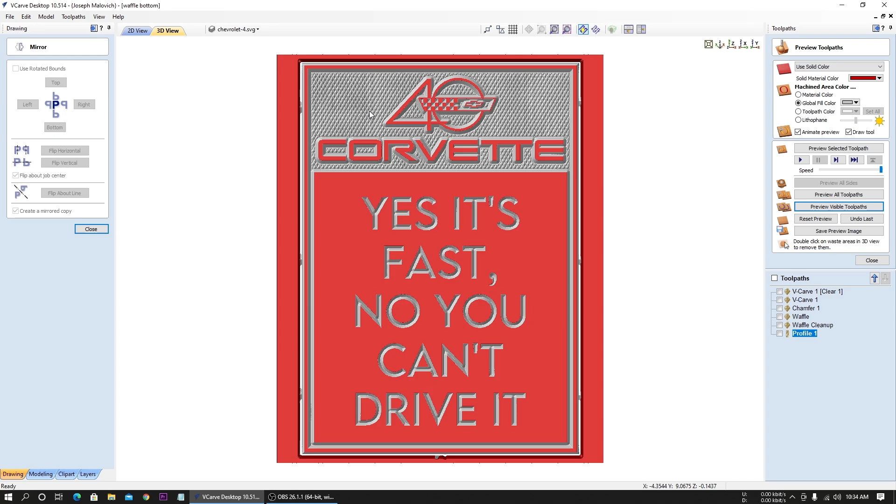We're going to replicate this type of pattern here, diamonds in the flat background of a sign.

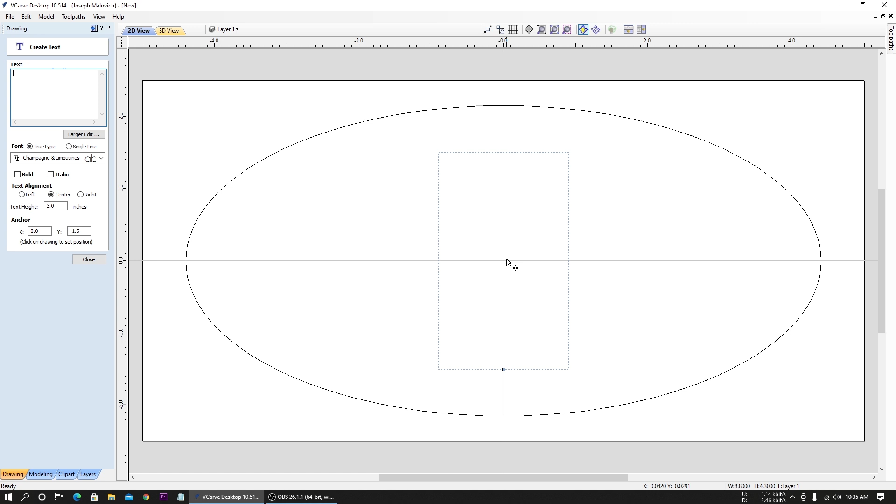Here I've got a blank file that I'm starting with. Just going to put some real simple things in here. Let's make it a little bit smaller, 1.25, so this is going to be minus 0.625.

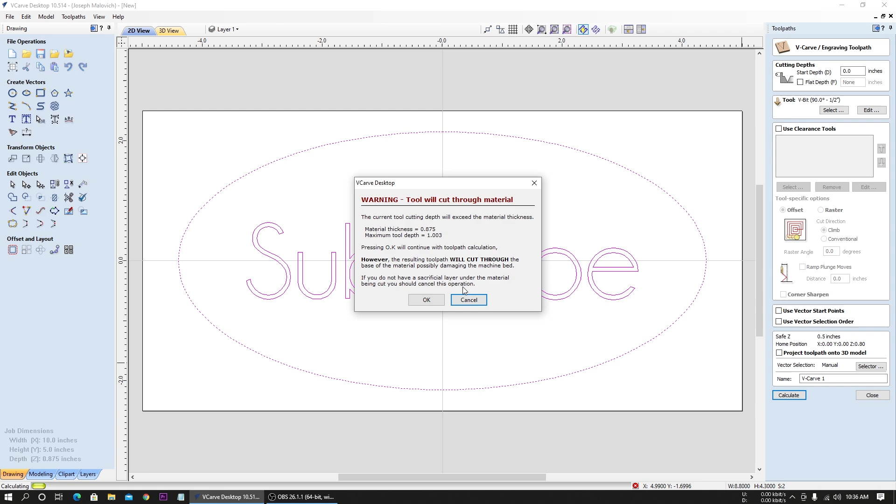Now we go to our toolpaths, and normally when you VCarve something, you select what you want to VCarve and it'll do everything. Let's go with this one, calculate. So what it does is it cuts, in the base format, as deep as it needs to achieve that shape.

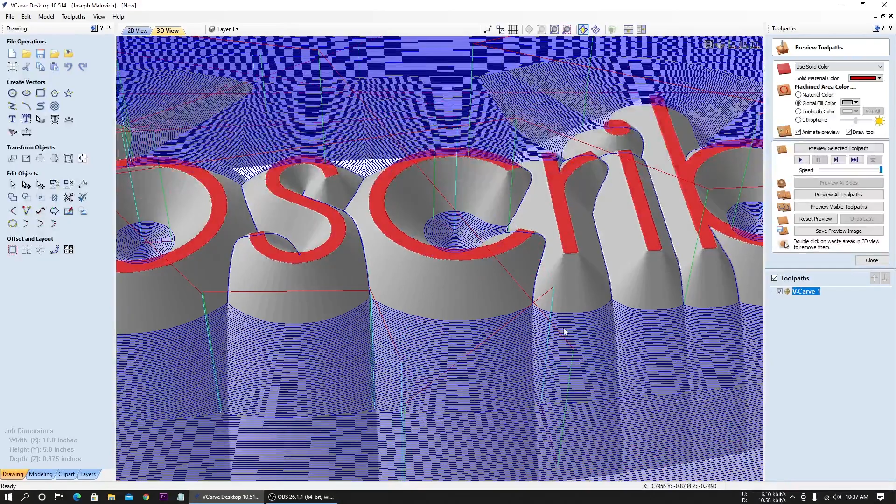But you can select a flat depth here. I'm going to go 200 thousandths, and then what it does is it carves out the flat area with the tiny little V-bit tip.

So if we go into preview this, you see it's going to do each one of these little lines, and it just takes forever. So we're going to try to do something that's a little bit faster and a little bit more decorative than trying to do these flat areas like this.

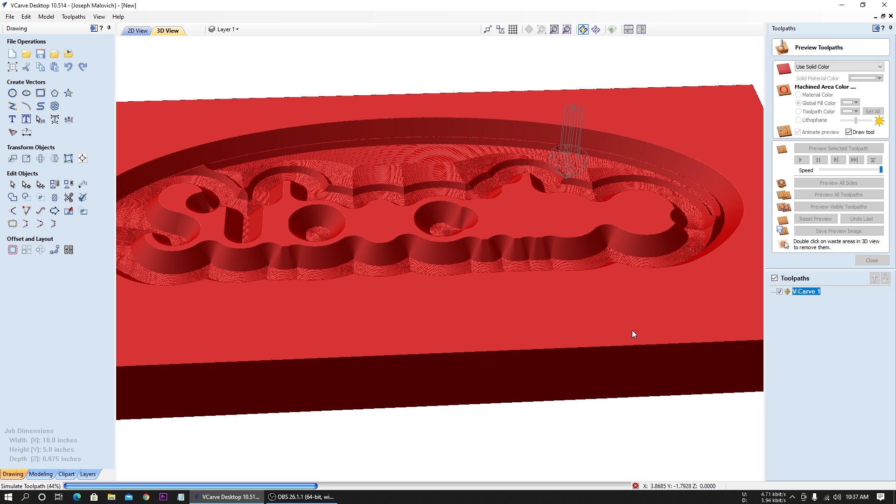Back to our 2D view, the first thing we're going to do is offset all of these inwards by 0.2 inches, which is the same as our VCarve flat depth, and not create sharp offset corners. All right, that looks pretty good.

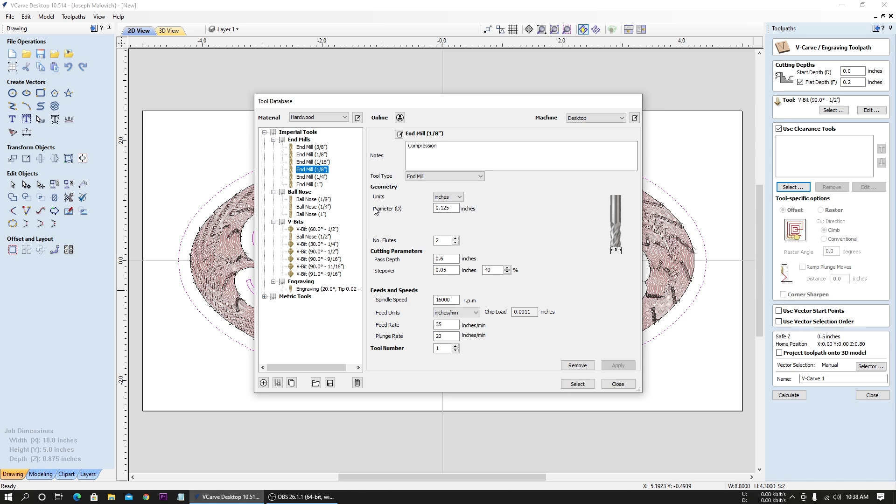Now that new selection is going to be what we want to not carve with our flat depth. So if we go into our VCarve here, we're going to use a clearance tool. Normally you would do like a 1/8 inch flat end mill, calculate.

And that would require a bit change, and it wouldn't take quite as much time, but it would also lead to some artifacts, and the flat bottom wouldn't look as sharp as it could. You don't see them here, but a flat bottom usually with the CNC router leads to artifacts.

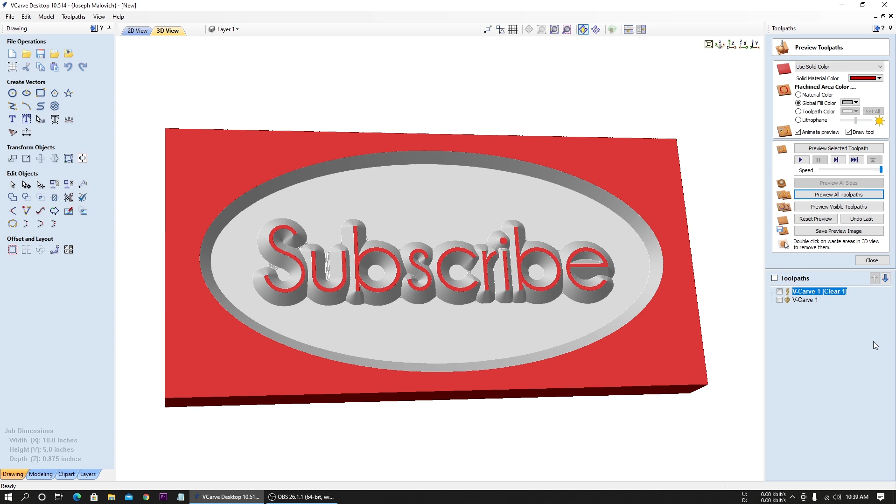One way to trick it into not doing any of the flat carve with this clearance tool is to select the V-bit as the clearance tool. So that looks almost identical to what it did before, but here's the trick.

Just don't do that. So now I have deselected this clearing path, leaving everything that we want to carve with our new vector texture.

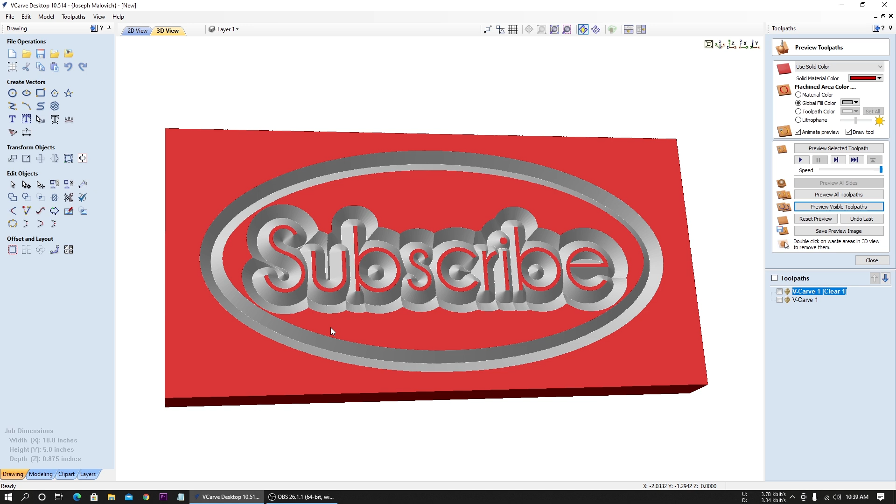Back in our 2D view here, we want to select everything that will be textured, which conveniently is only those few selections.

When you do an offset, you can have it select the new offset, so you don't have to go through and manually select everything. And then when you're done with this, you immediately go to your vector texture, and now everything is already selected that you're going to be texturing.

These are the settings that I have for the diamond pattern that I've been using. You can of course change the background that you get with all of these settings here. You can change the spacing to be really wide or narrow and just achieve different effects here. But I'm going to do...

0.1 inches is a good spacing that I like, with 0 variation, 0 amplitude. Wavelength doesn't matter if there's no amplitude, and 0 noise.

As well as changing the angle, to edit these you do have to select that, go back to your create vector texture, and if you just hit preview again it deselects your area, but you will have to go in and reselect your area to get the correct selection. And now this will fill in just the area.

That looks good. Okay, now I'm going to do another vector texture. This one's going to be minus 60 degrees. And there's our diamond pattern.

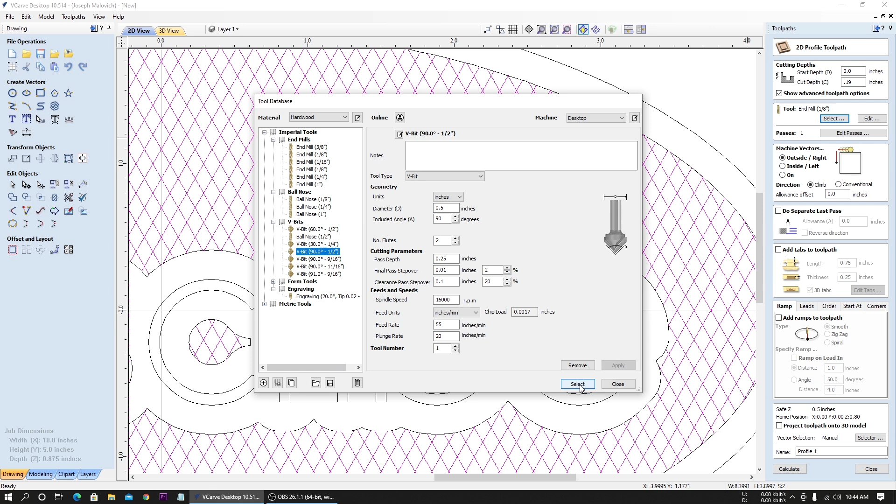Now for our V-bit, we're going to select the same V-bit that we did the perimeter. One thing to mention while I'm still on the tool bit is we've already cut the perimeter, so there's no material that it's plunging into. To speed up the carving time, we'll set this at a much higher plunge rate because it's plunging into air, and that just speeds everything up.

We don't need a ramp or leads. For order, I like to do whatever the shortest path is just to speed it up. It doesn't really matter — you could do left to right if you want to watch it, but shortest path is fastest. You can hit optimize start points. Corners, doesn't matter. Calculate.

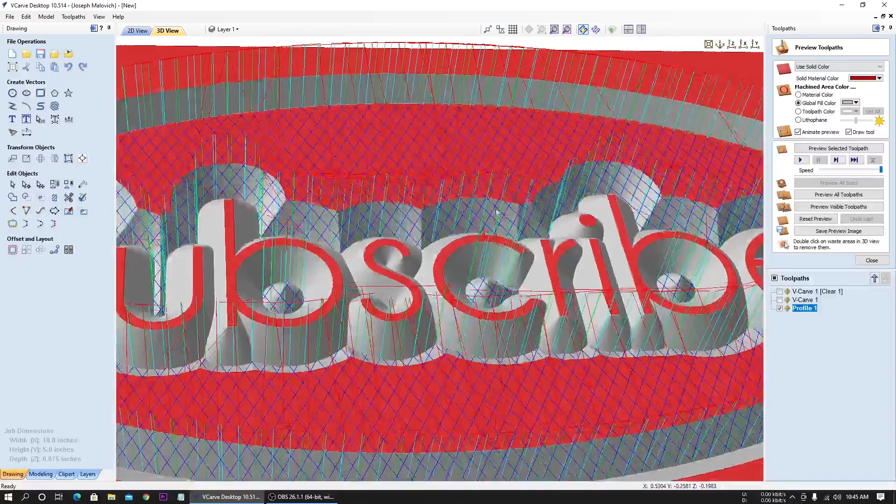And there we go — there is our diamond pattern. Let's reset preview visible toolpaths, which is only going to be these two.

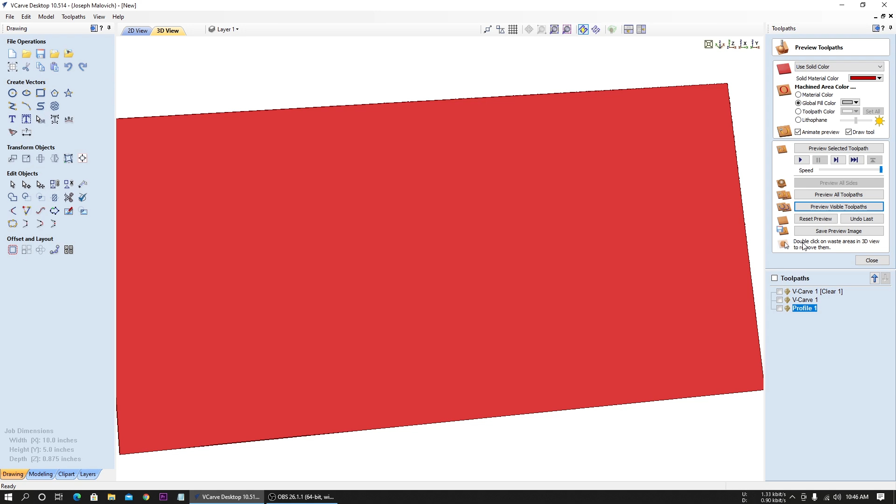That took quite a lot of time on my computer, so for video, very high is nice — you get extra quality that you guys can see, but standard will just speed this up a lot more. Reset preview visible.

And then it just rams right through them. Actually, on the video it looks pretty similar, so we can just keep going with that. I turned up the simulation quality just to show, zoomed in, that it doesn't actually go all the way to the edge.

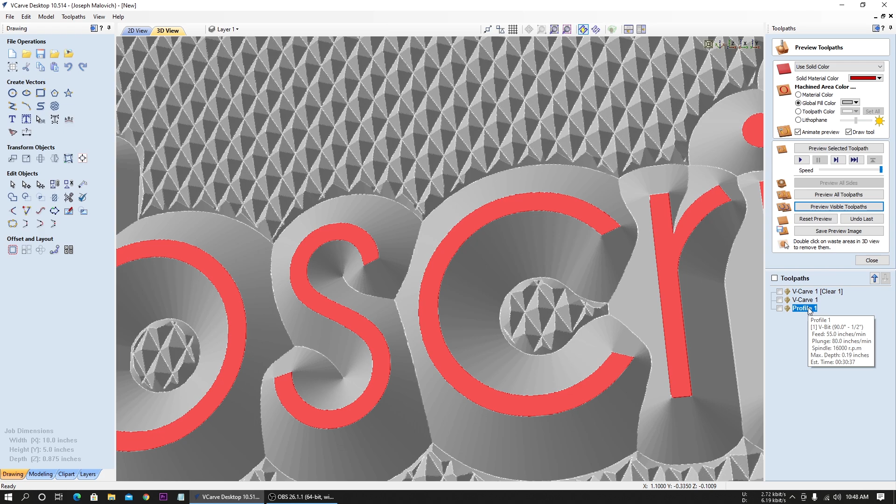That's because we set our profile depth to only be 0.19 inches here. You do want to be grain aware when doing this. If the grain is in a vertical direction, you probably want your diamonds in a vertical orientation. If your grain is horizontal, maybe use different horizontal diamonds or square diamonds, or you could do just perfectly straight horizontal lines — that could look good as well.

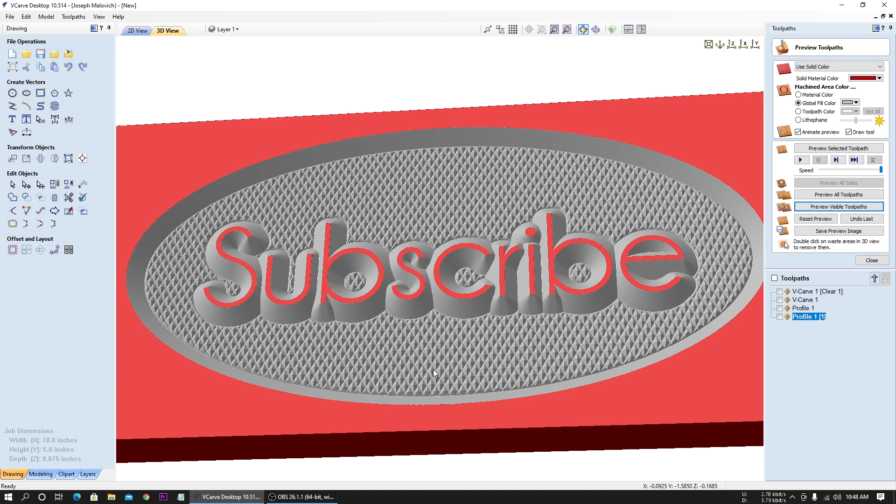But I often get a lot of fuzzies in here, so what I'll actually do is duplicate this and run it a second time, just as a cleanup pass, and that removes most of the fuzzies that I have left.

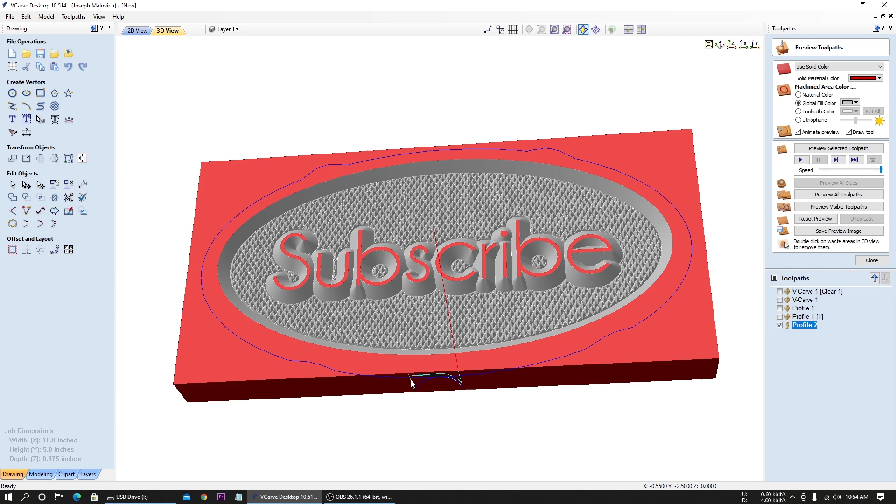Now, just for this demonstration, I'm going to do a perimeter. We're going to give it a 1/4 inch offset, select a 1/4 inch end mill, add tabs, edit tabs. We're going to do a tab there and there and there and there. Close. Add ramps, add leads to, start at the bottom. Leads — good. Calculate. My depth here is going to be 0.875 inches.

Edit passes — we're going to go up to 4 passes. I'm doing it in black walnut, which is pretty hard. All right, preview visible toolpaths.

Doing a really nice waffle bottom there, doing the perimeter cutout. All right, excellent. Now this last profile cut that I did here, you'll notice it goes all the way around without any tabs.

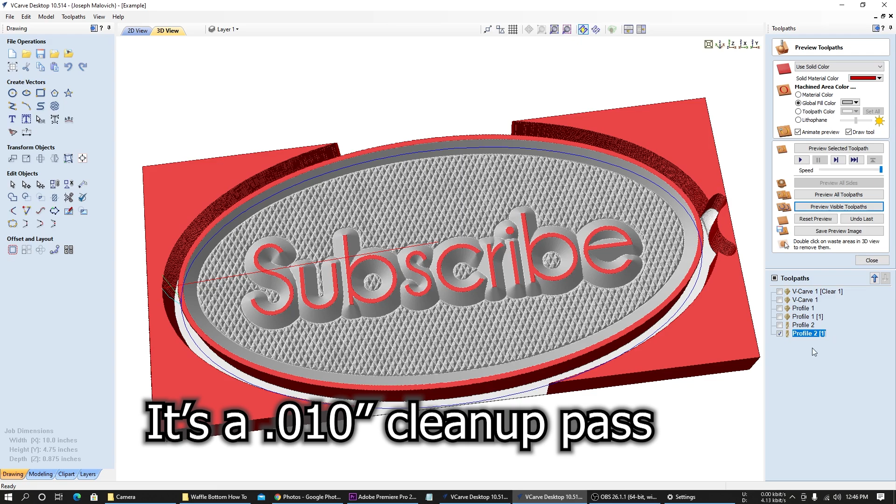This profile, I do have tabs in there — you can see right there I have a tab. The last cut, and you have to be really careful when doing this because you don't want to cut a finger off or run your finger into the router bit — when it does this final pass, I actually have to press on it with my hand so that it doesn't move.

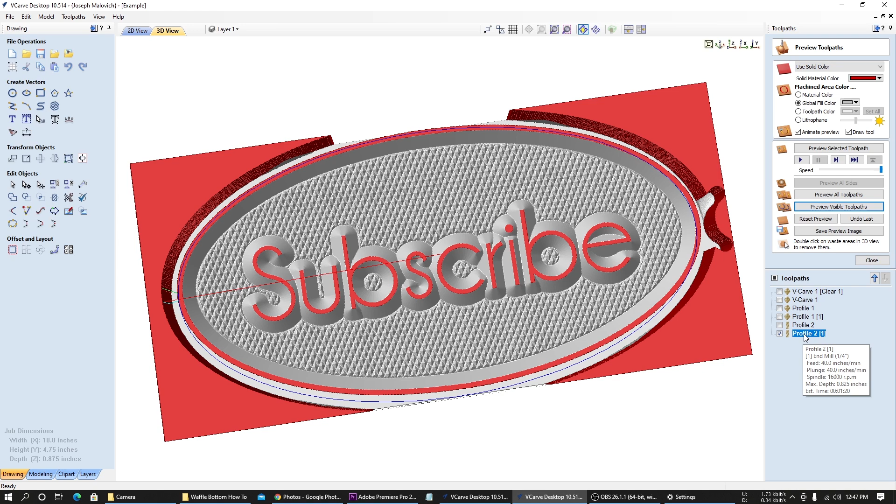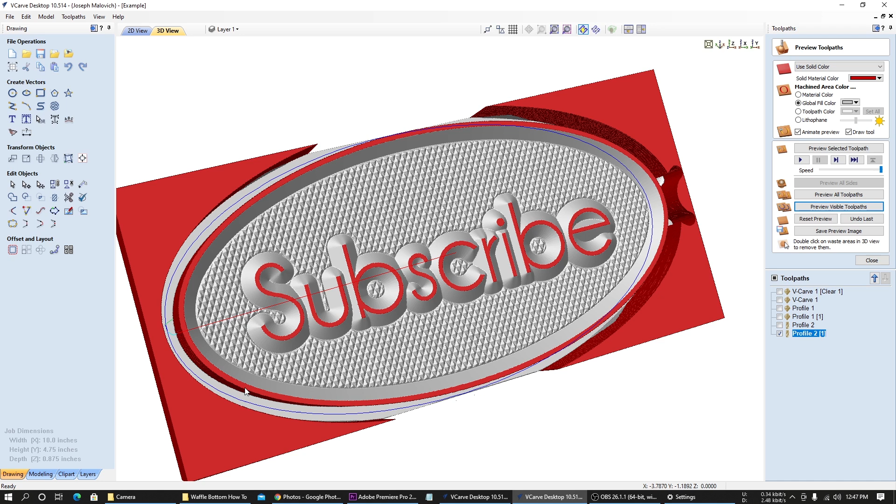I'm filming this after I already cut it out, and I realized that the start and end point for this - you can see the last profile cut is right here, and ideally you would want your last few tabs to be right along here as it's coming in to finish that cut, so you're not relying on your hand pressing it down with no other tabs remaining.

Another option, when you're doing the first profile cut, is to not use any tabs. Just go down to within 50 thousandths of cutting through, and then on this last profile cut, do your last 50 thousandths, and that'll keep it mostly secure in one spot. You will have to hold the workpiece down as it cuts that last little bit on the edge.

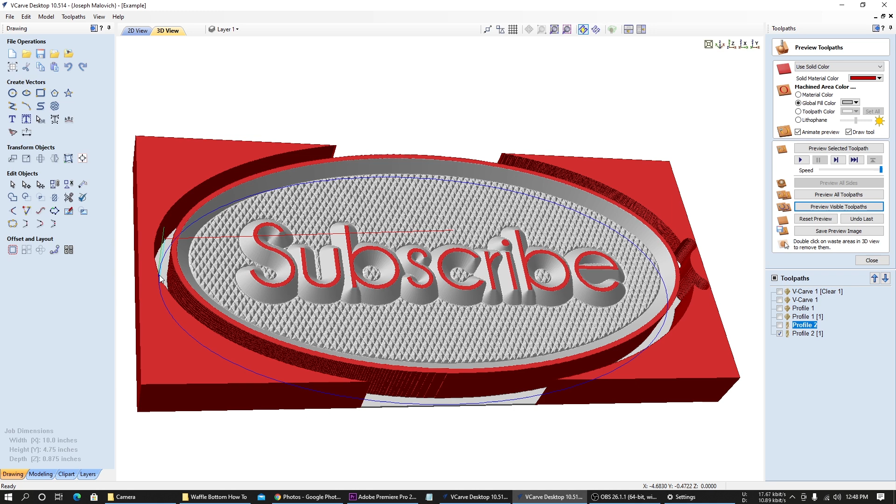The key when running this through your post processor is just don't post this clearance toolpath. So for visible toolpaths, that'll be these 3 that are checked. That's VCarve 90, save that. And then all I want to do is this final last profile toolpath with a 1/4 inch bit, profile 0.250. All right, that's our toolpaths done.

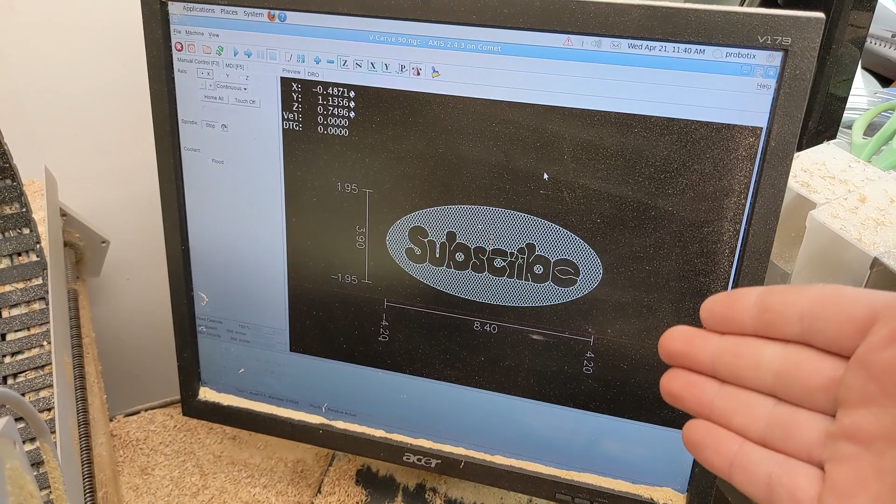Let's go hit it on the CNC. And here's what it looks like on my CNC computer. This is Linux CNC, running on an eBay router that I've mounted on a Probotix Comet.

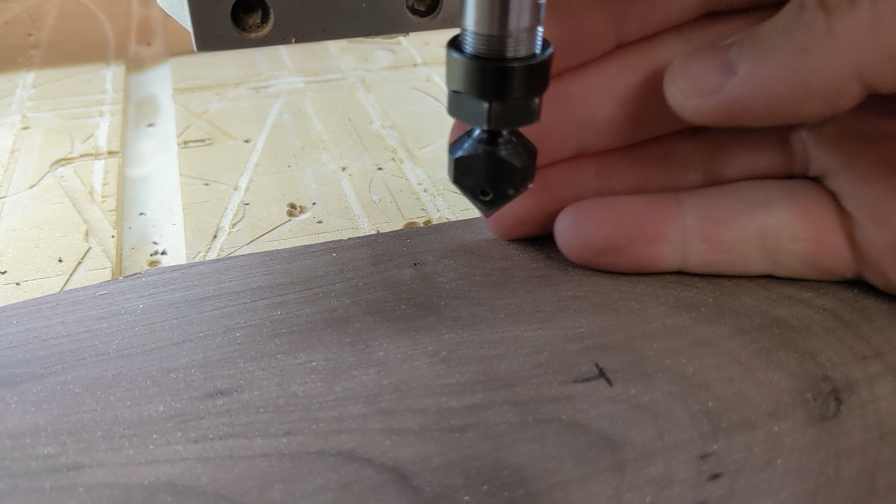This is an Amana 90-degree insert bit. It has a replaceable insert, so if I ever chip it or get it dull, I can just flip it around or replace it, and they're only a few bucks each. Everything's set and ready to go. Let's turn this on, crank it up to full speed, and hit run.